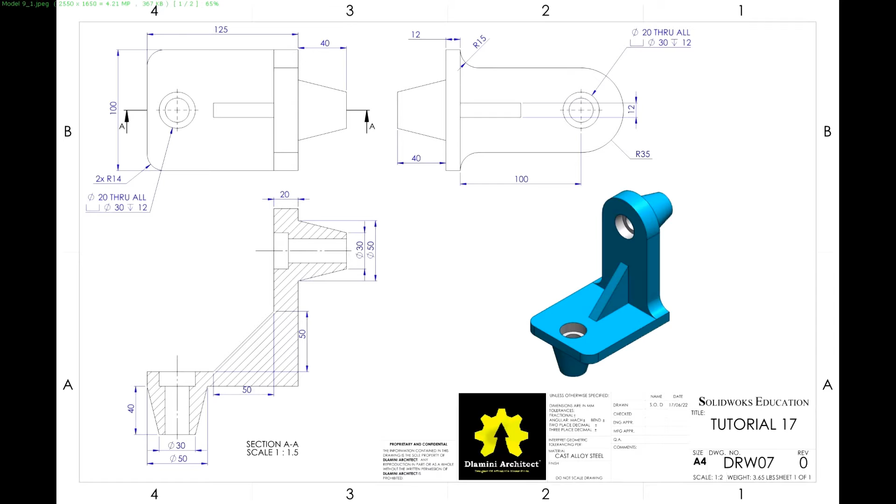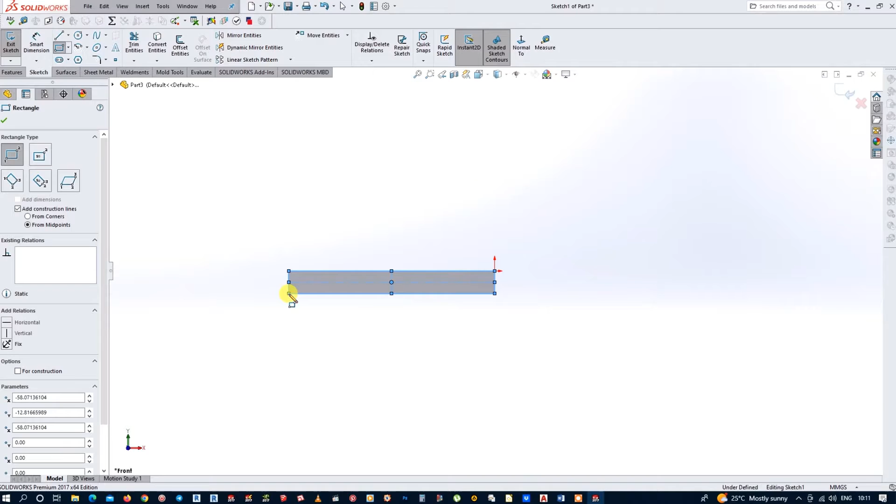Start a new part file, and make a sketch on the front plane. I'll do this corner rectangle, and give it a length of one side as 125 millimeters. And the thickness of this part side should be 12 millimeters.

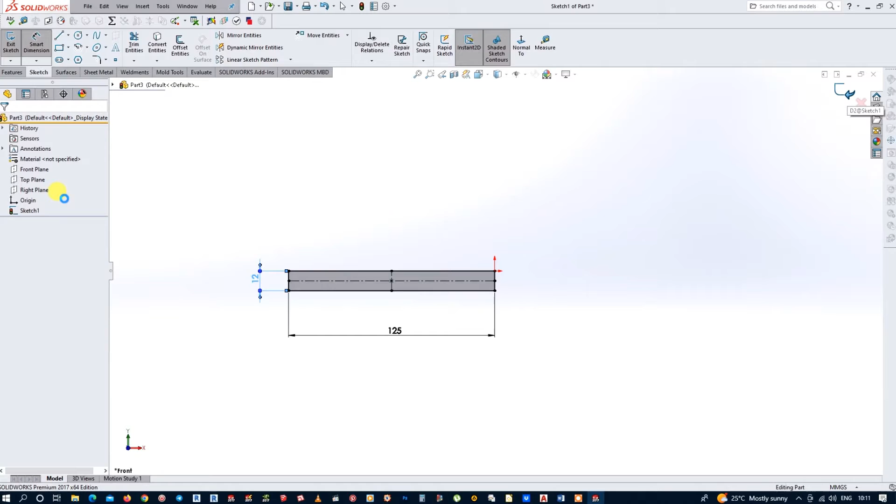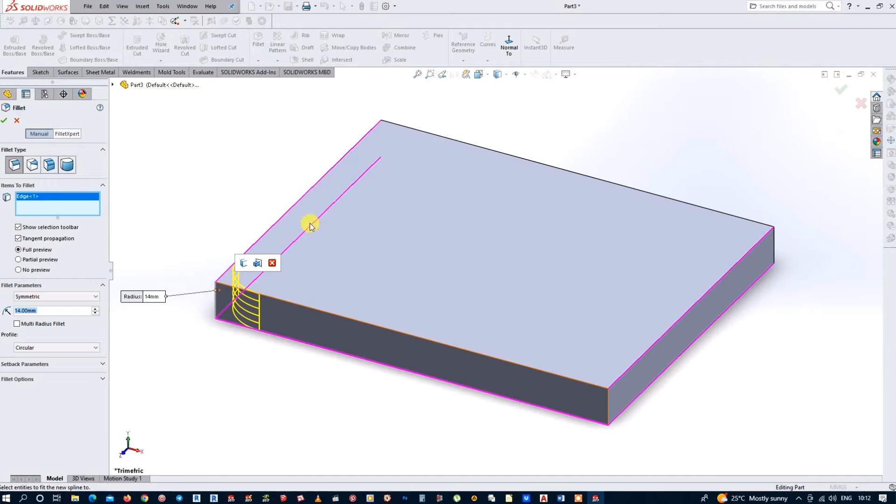That fully defines our sketch. Exit and do a mid-plane extrusion of 100 millimeters. Before I forget, put the fillets in there: 14 millimeters each, 2 fillets. Done, that's our first part created.

Now from this top face, make a sketch. Again, corner rectangle, just drop it somewhere, you can constrain it later. Now this midpoint with the origin, relation coincident. Let's define some dimensions: that will be 20 millimeters, and the front side will be 35 times 2, which is 70 millimeters.

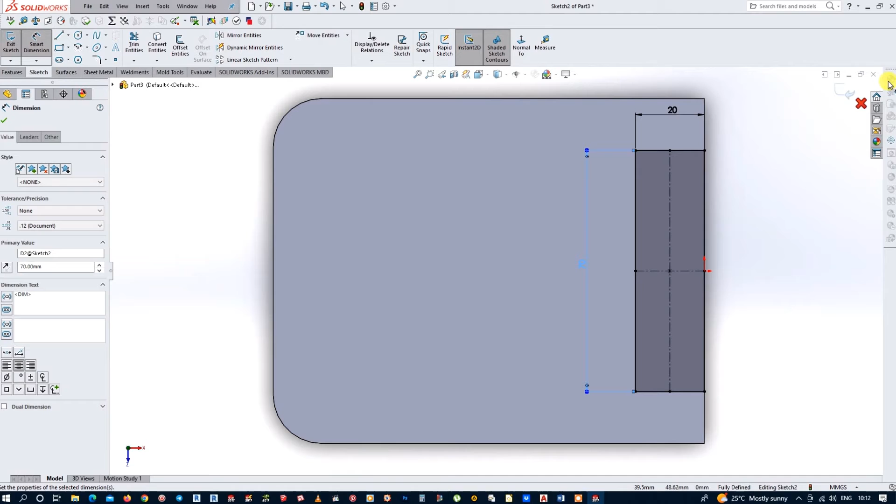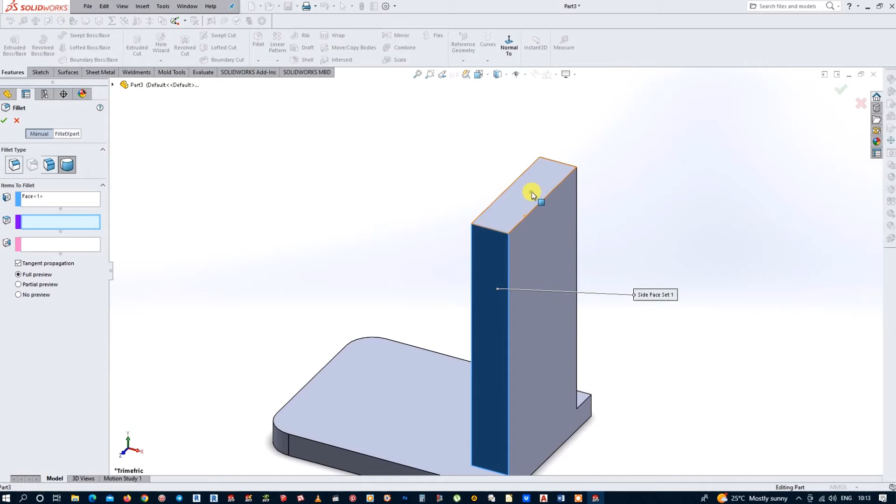Now we will extrude it to 100 millimeters, or should I say 135. Here it looks like 135, but let's see - we'll make it 135. We're also going to do the full round fillet on top there. Go to the fillet tool, change to full round fillet. Just pick 3 sides and it will fillet the whole thing as a radius. Perfect, the 3 faces get a nice fillet. There's the second part completed.

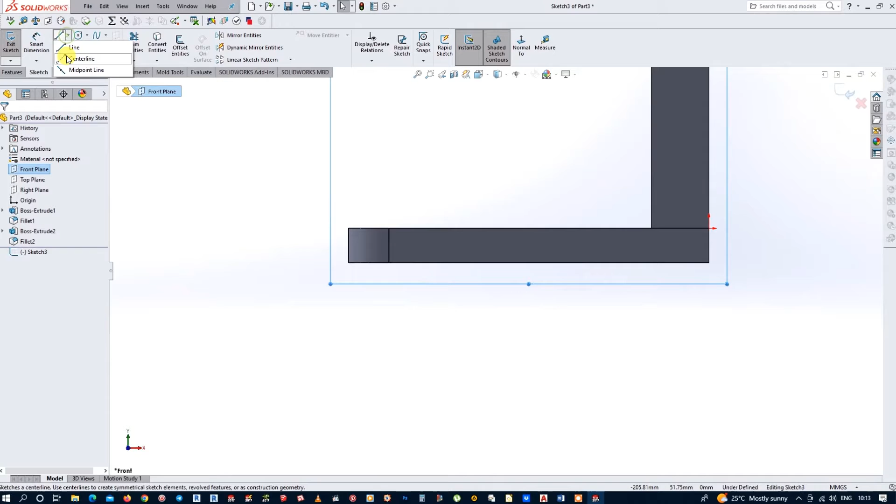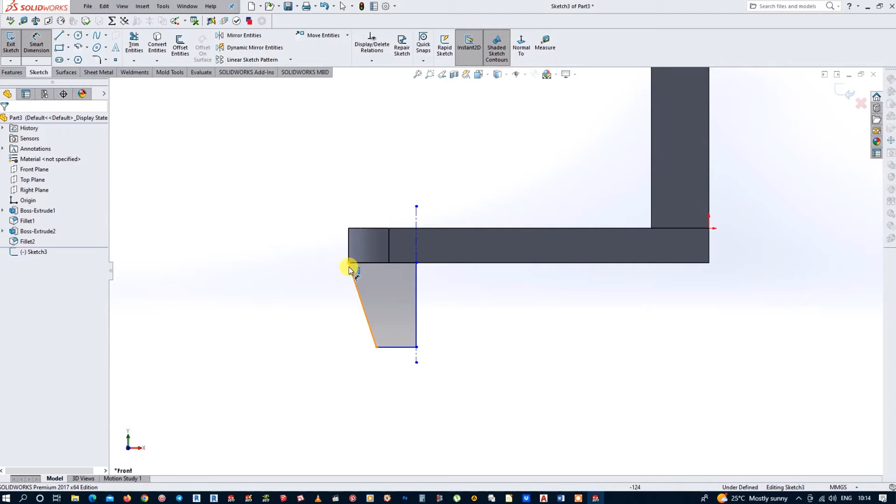Now go back to the front plane, make a sketch. Put a construction line somewhere, we'll get a dimension to constrain it. Then just do a line straight down, go sideways, and close the sketch. Now let's get some dimensions to define this. From this edge to the center line, that will be 25, and from there to there, that should be 30 millimeters.

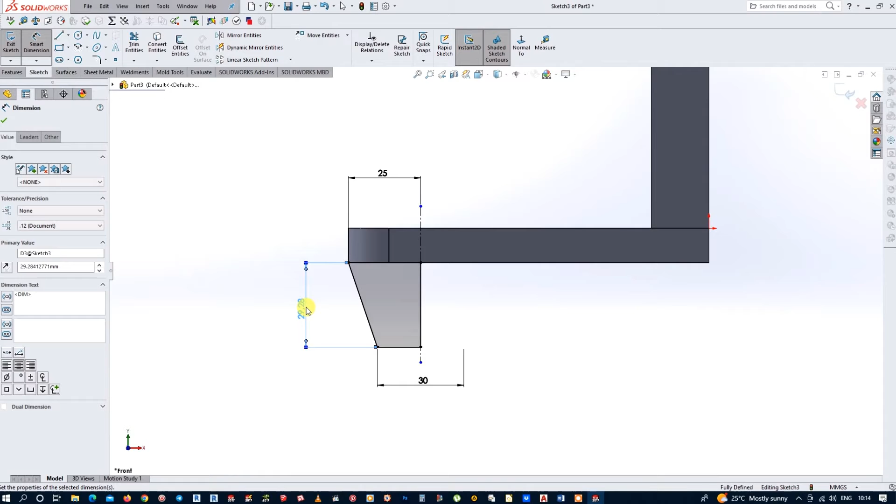That's defined already, cancel that - over defining it now. We need the bottom there, that's 30 millimeters. Now our sketch is fully defined. I need to close the sketch and do a revolve boss base. There's your sketch right there. Just keep the sketch visible, you don't need to constrain something.

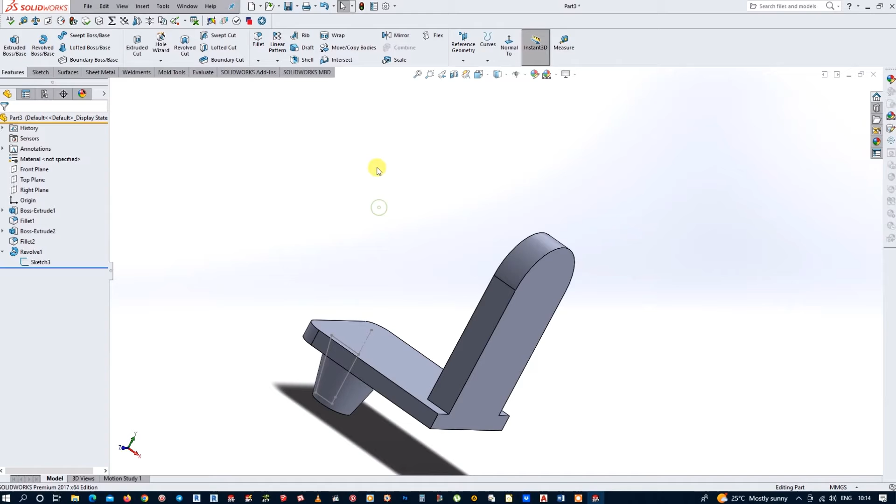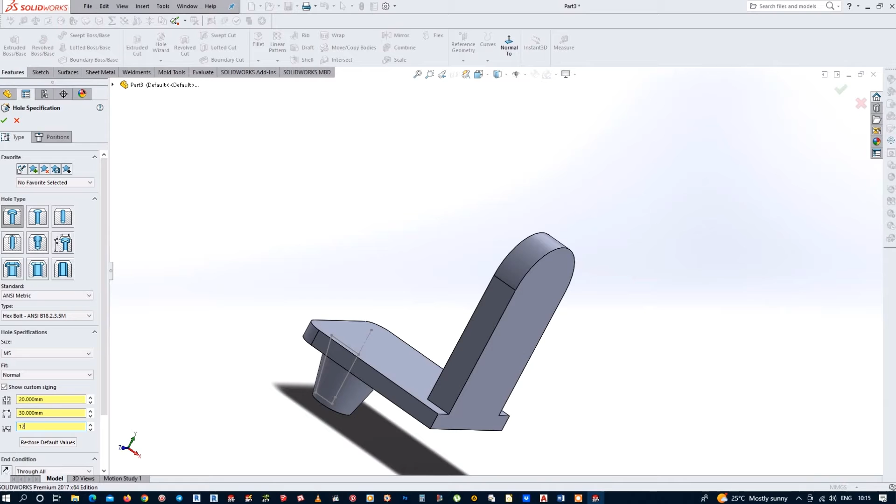Now use the hole wizard to make a hole through this part. Our hole dimensions: we've got a counterbore hole of diameter 20 millimeters through. Counterbore is 30 millimeters, and the counterbore depth is 12 millimeters. Lovely, now position the hole - it's going to be on this face.

Now I need to try and put it on that old sketch. See, it's not showing up there. There is a way, it's still not working out. Let's see, you drop it somewhere there, and then I'm sure you can now pick. You still can't get that sketch. Right, that and that, you can make it vertical. I think it's not straight still.

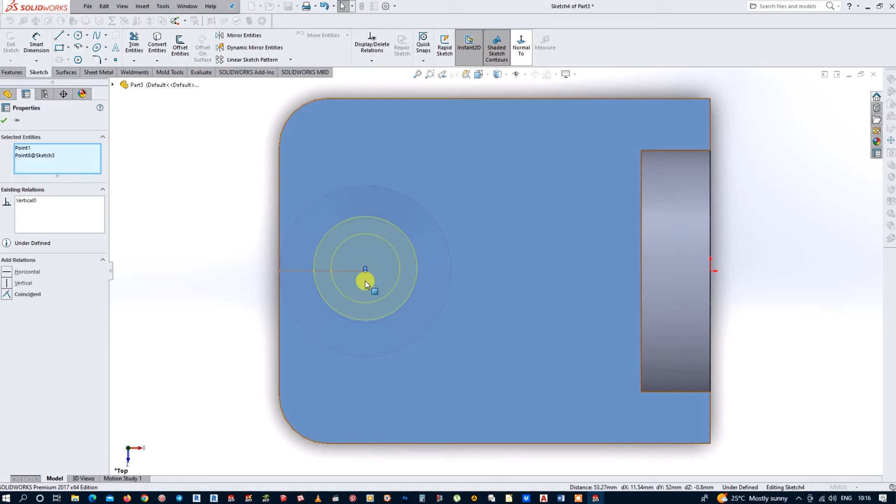Now you select that point and make those horizontal. Now our sketch is locked, the hole is locked in now. There's your hole right there.

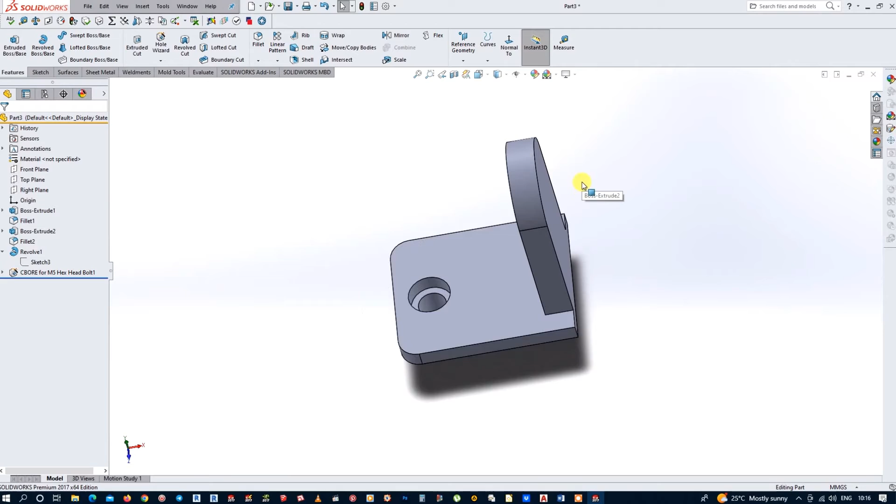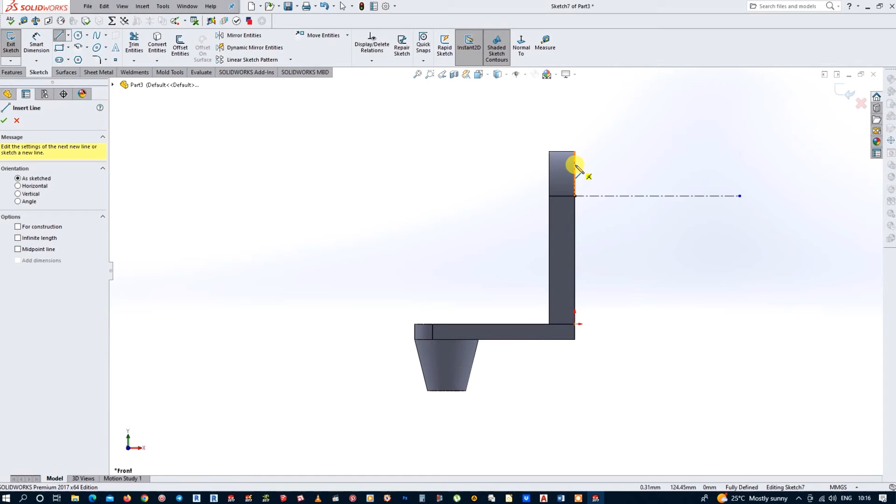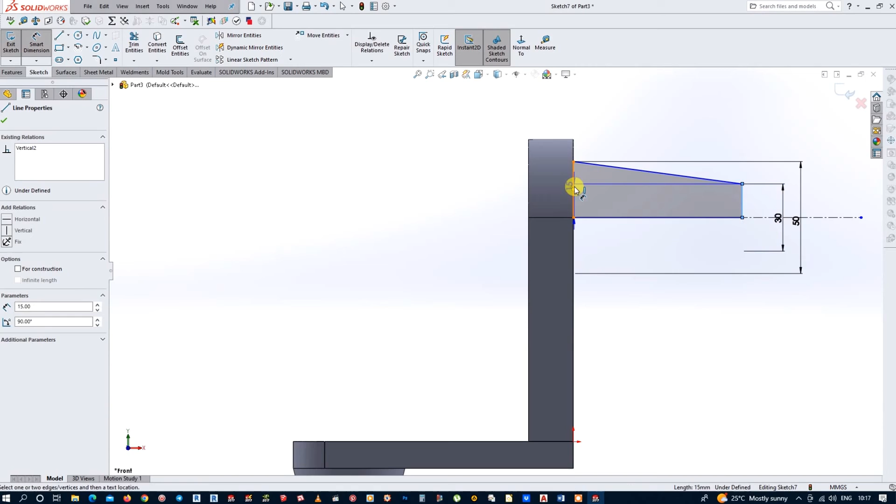Make a sketch on this face - one sketch on the front plane again. Front plane, make a sketch there. Get your construction line, it should stay in the center of that arc. Now draw a line: from there, straight down, go straight across, go up, and then come back and join it. Now let's define: from there to the center is 50 millimeters, from there to the same center is 30 millimeters, and the total length of this post is 40 millimeters.

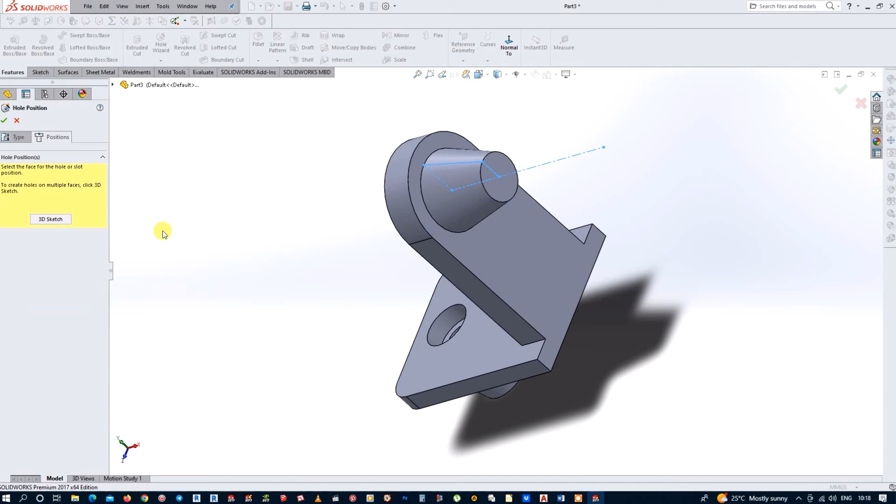And now we are fully defined. Close the sketch and revolve. Lovely. Now we need the same hole, so everything is already set, just gotta position the hole. All the settings are still there. Pick the position, pick this face, hover on the edge of the circle, the center will appear, and pick the center. Your hole is straight in there. Lovely.

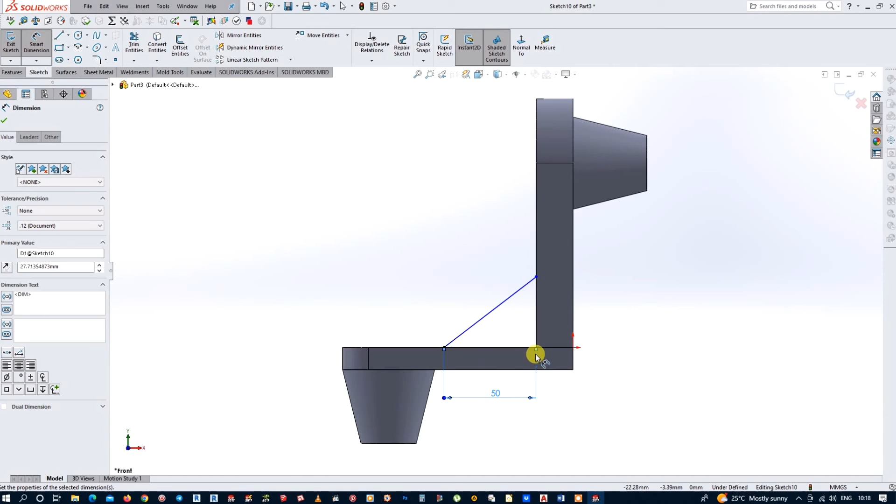Sketch on the front plane. Now I'm going to do the rib. Don't put it on any points there, don't get any relations on it. This is from there to the edge, that's 50 millimeters. And this is from there to the top of the line, that's 50 millimeters. Our sketch is fully defined.

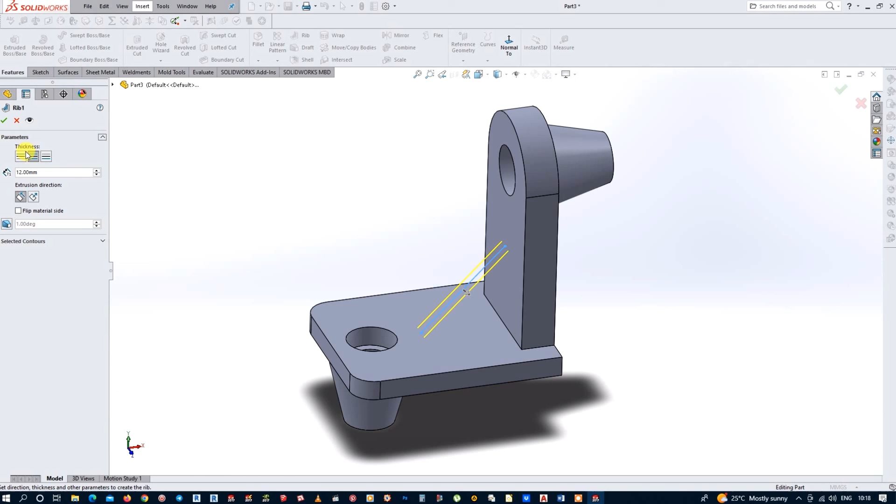Close the sketch, activate the rib tool, change the thickness of the rib to 12 millimeters, and okay, there's your rib there. We're almost there. Now get a fillet tool and put 2 fillets of 15 millimeters each. Change to 15 and bang a fillet there, and bang another fillet on this side. And we are done, that's our part.